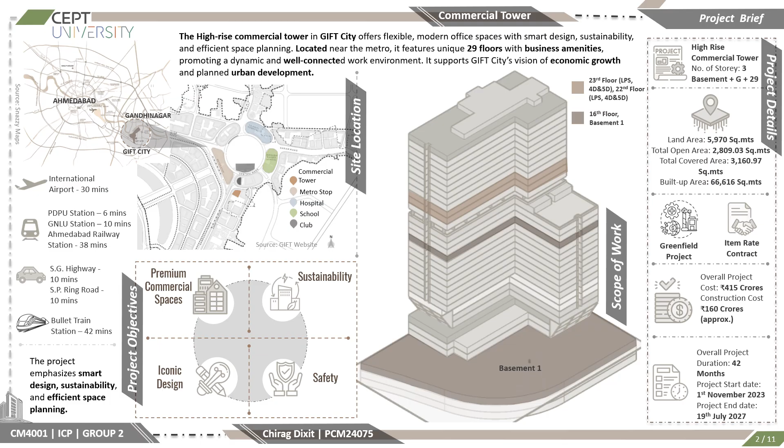Moving to the Last Planner System tracking of the design schedule. This shows week 4 of the LPS plan covering both LOD 200 and LOD 300 activities for architectural and structural modeling. Several planned tasks in Revit setup, structural modeling and architectural modeling faced partial or missed commitments. Although some activities progressed smoothly, there was noticeable variability resulting in a weekly PPC of 75%. This indicates that during week 4, the design workflow required better coordination, improved commitment reliability and smoother handovers between teams.

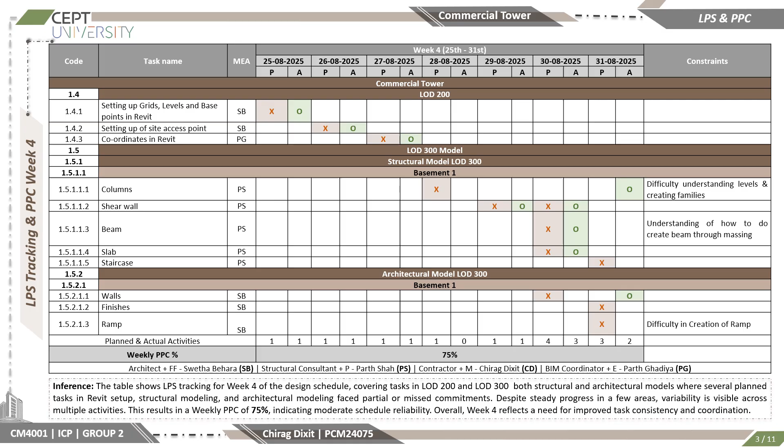In this slide, the data shows the LPS tracking across multiple weeks. Week 4 started with variability and a PPC of 75%, but as the weeks progressed, the workflow became more stable, and by week 15 the PPC improved to 100%. This clearly shows how consistent coordination, better constraint removal and disciplined weekly planning significantly improved schedule reliability. The LPS framework helped bring predictability and reduce rework in the design stage.

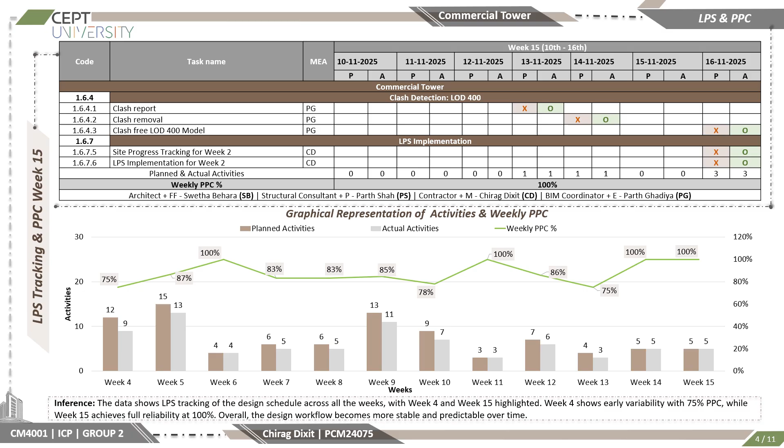Moving on to the quantity takeoff part. The quantities were calculated manually and Revit-based for the studio's scope of work, which is basement 1 and 16th floor for LOD 300 architectural model, LOD 300 and 400 structural model, and all the LOD 300 MEPF models.

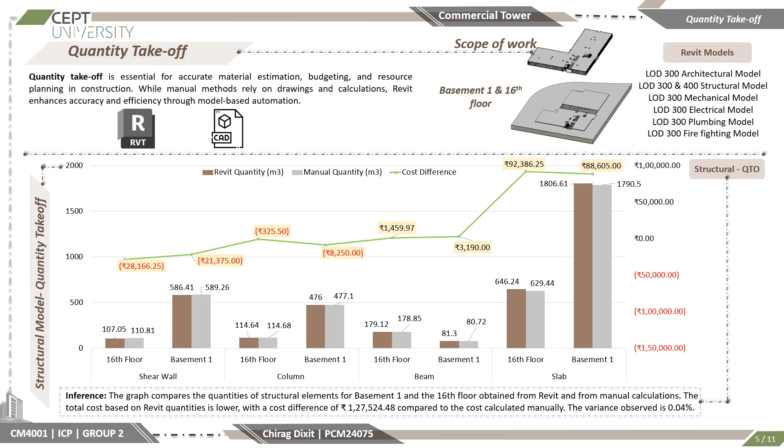Starting from the structural model's quantity takeoff, the quantities for basement 1 and 16th floor were compared between Revit and manual methods. Revit provided slightly lower cost estimates with a difference of approximately 1,27,500 and a very small variance of 0.04%. This shows that model-based quantity takeoff is highly reliable and minimizes human calculation errors.

Now focusing on the quantity takeoff of the architecture model. For architecture elements, especially AAC walls, there was a noticeable difference in quantities between Revit and manual methods. Doors were exactly matching in both methods. Therefore, the overall cost difference came to around 1,52,550 and the variance was around 1.06%. This result highlights how model accuracy directly influences material estimation and budgeting.

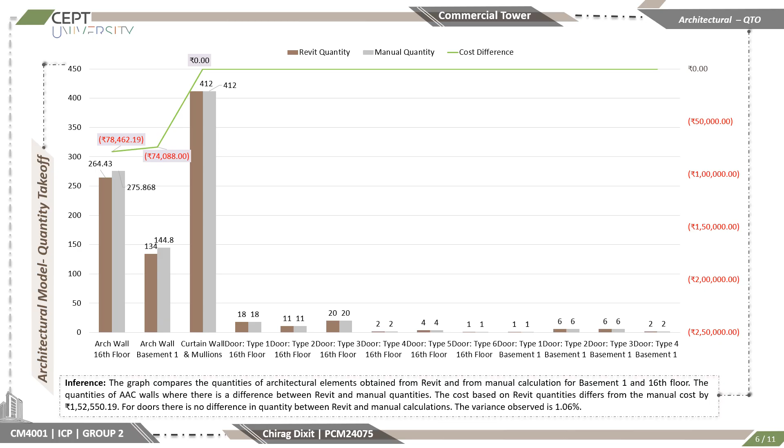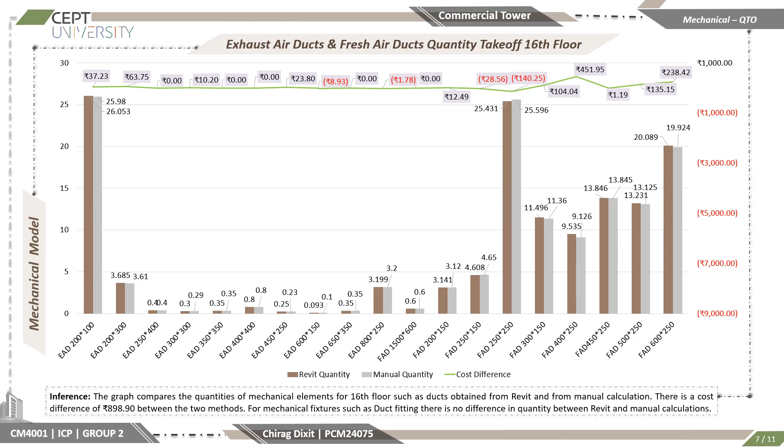Now for the quantity takeoff of the mechanical model, for the mechanical discipline, quantities of ducts on the 16th floor were compared. The difference between Revit and manual quantities was minimal, with a cost variation of around Rs 898. There was no difference in the count of duct fittings, confirming precise modeling and consistency in the mechanical layouts.

For mechanical model elements such as chilled water return and supply systems, the Revit and manual quantities showed a cost difference of Rs 4031. Fittings such as butterfly valves and duct fittings matched exactly in both quantities. This again demonstrates the reliability of model-based quantity takeoff, especially for MEP components where alignment and routing play a major role.

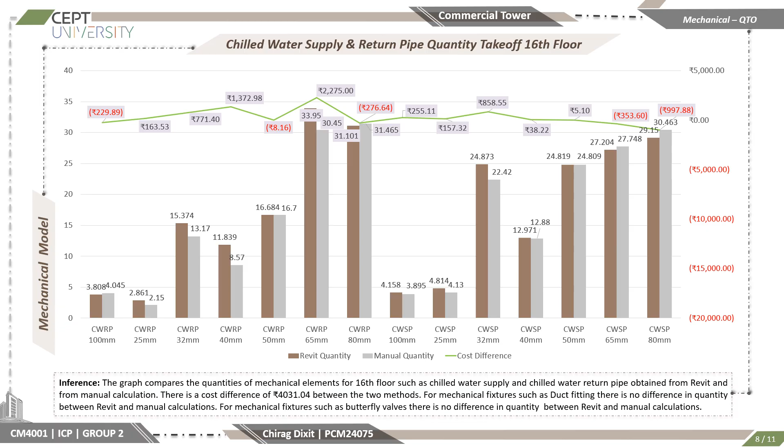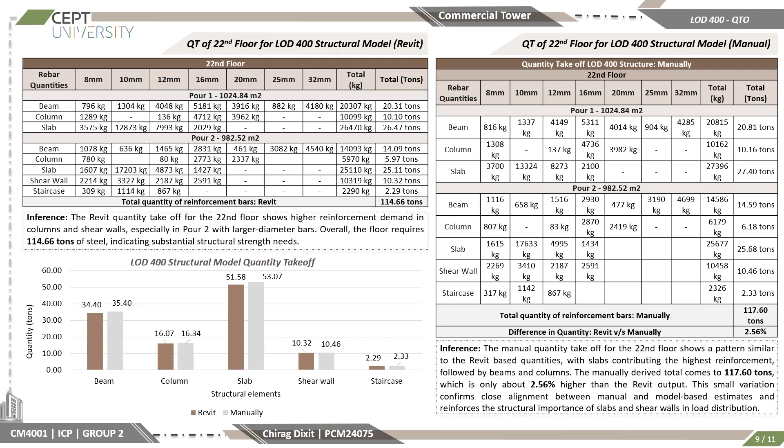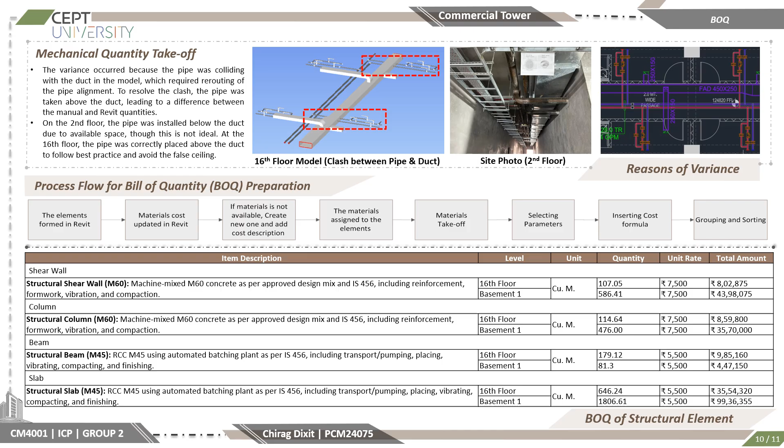So after all the quantity calculations, BOQ was prepared for all the models, and here the BOQ of the structural model is shown, in which structural elements such as shear wall, column, beam and slab are shown, and quantities were extracted from Revit and SOR rates were taken.

To conclude, this portfolio provided a complete understanding of project planning, modeling and construction workflows. The LPS tracking strengthened my skills in constraint identification and weekly planning reliability, improving PPC from 75 to 100%.

Model-based quantity takeoff in Revit proved highly efficient, accurate and reliable when compared with manual calculations across structural, architectural and MEP disciplines. This accuracy also supported the preparation of a robust bill of quantities, enabling better budgeting, procurement planning, and cost control. Overall, Studio 3 Integrated Construction Practices has been a comprehensive learning experience that connected digital modeling, planning techniques, and real site conditions into one integrated workflow.